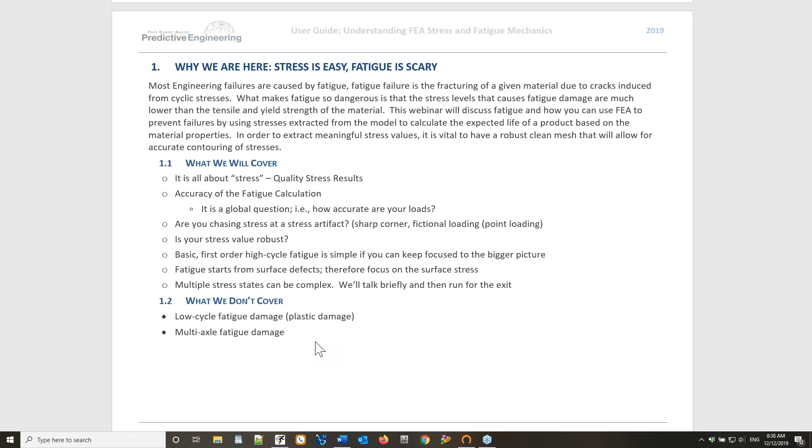And it's actually a legal term. If you're a professional engineer, you're required to work within your specialty, in the sense that you're competent. If you stamp a document, put your seal on it, it means you're working within your competency. So I think this little fatigue discussion today will allow you to say, okay, this is within my competency, or go find an expert to figure it out for that other 20%.

What do we know? Why are we here? Why is this not just rambling? We've done lots of stuff on fatigue, lots and lots of stuff. It's been tested, it's been in the field, it's been running for years and years.

And that's where I call the difference on a simulation engineer - it takes longer for you to get qualified because your mistakes have to catch up to you. Many people can bang out a model, done, look at that, fantastic. They can build it, they might pass initial prototyping, and then it goes into the field, but won't survive in the field. And that takes a few years to come back.

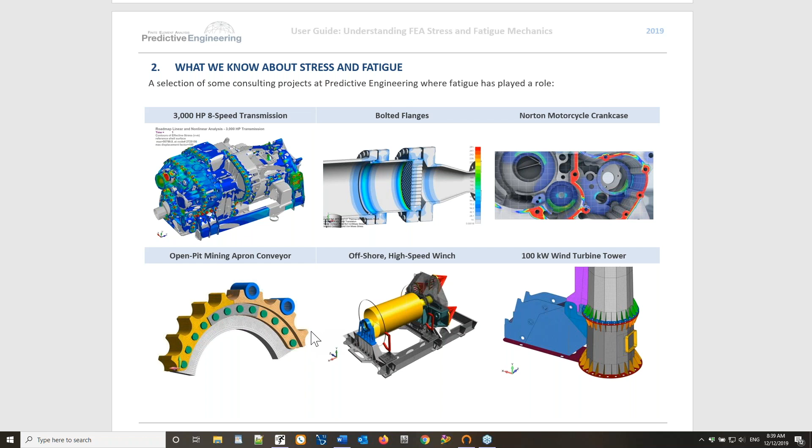So all these things - we've been at Predictive Engineering now going on 25 years, so we haven't had anything yet come back that we know of. So transmissions, pressure vessels, crankcases for motorcycles, gears, open pit mining - all these things involve doing fatigue analysis.

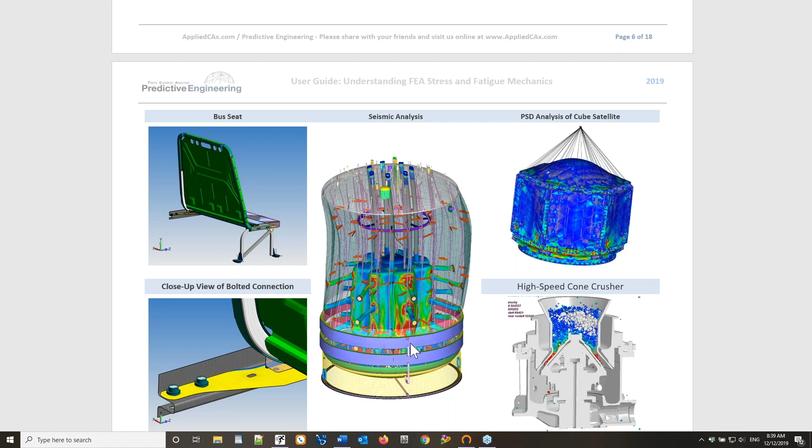A lot of this stuff is as simple as looking at the stress and saying, it's low enough, it's not going to fatigue - done, checkbox. Some of these are not so simple. This one, in the seismic analysis, was spreadsheets and spreadsheets and spreadsheets of summing load cases and directions and adding vectors. Hey, but it worked.

Mining equipment, composites - composites are another story of fatigue, another topic, I don't want to get into it. We could definitely spend time in the weeds on that. Okay, that's sort of our background, why we're here.

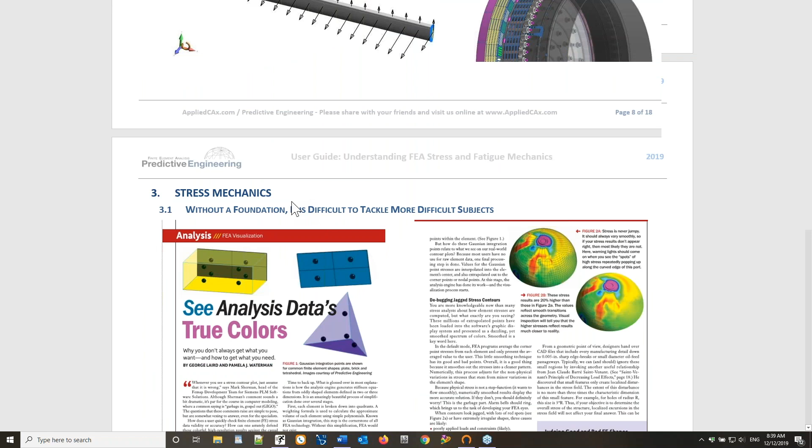Stress mechanics. When people get into it, we're using isoparametric elements to fill up shapes - random geometry, random surfaces, shell elements, isoparametric, solid elements, isoparametric. They're all using approximations to capture the deformation gradient through the structure.

Finite approximations. So isoparametric means it's using the same shape function to map the displacement at the corner nodes to the interior of the element. Then it can calculate strain inside the element, and from that strain, you get stress via Hooke's law. So it's a two-step thing.

Since you're using these approximations on an isoparametric element, it maps everything to a unity space, -1 to +1 in the dimensions. So whatever shape your element starts out with, it always ends up being numerically mapped to unity, -1, +1. The more uniform your element, the easier the mapping, which is called the Jacobian. The easier the mapping, the more accurate the element is in capturing the area for a shell or the volume for a solid, which translates to more accurate stiffness values, more accurate displacements, and more accurate strains and stresses.

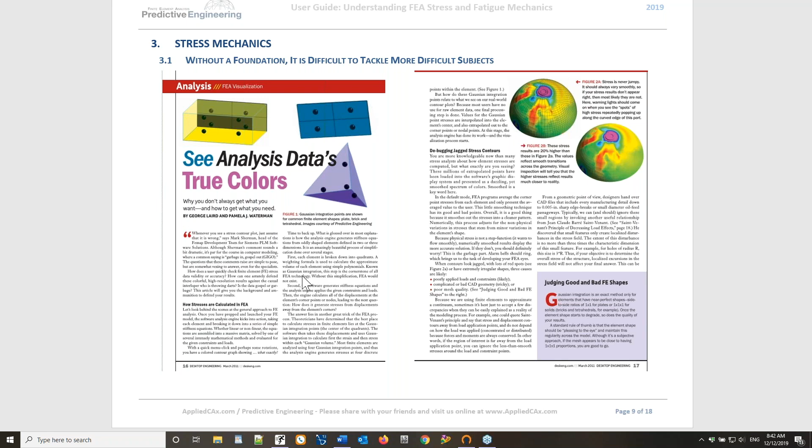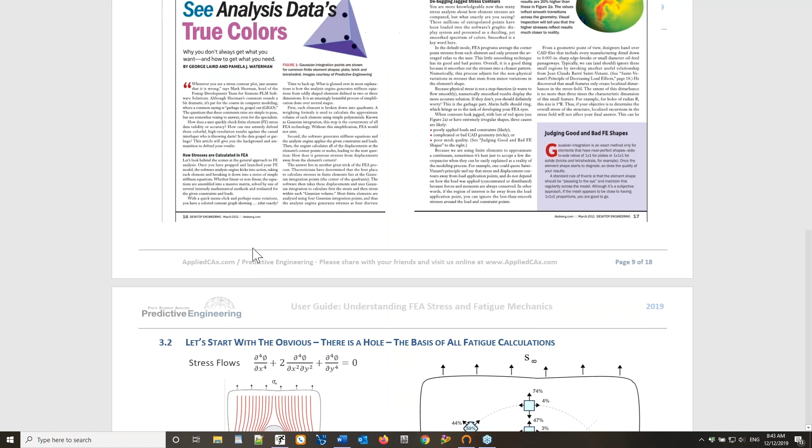Yay, I know, if you guys in the audience can't tell, this really is one of my favorite topics. I love all the mechanics stuff on it, and it's not a bunch of math. It's just unfortunate that most of the FEA textbooks out there are developed by mathematicians that masquerade as engineers, and they just love equations, and you go, wait, I know this has some real use.

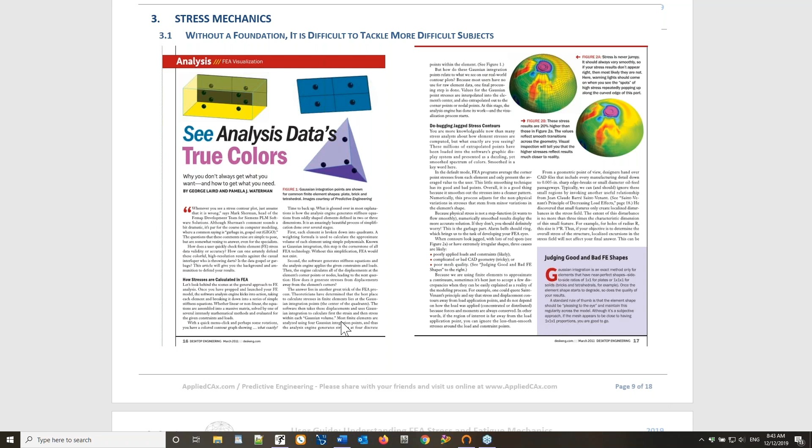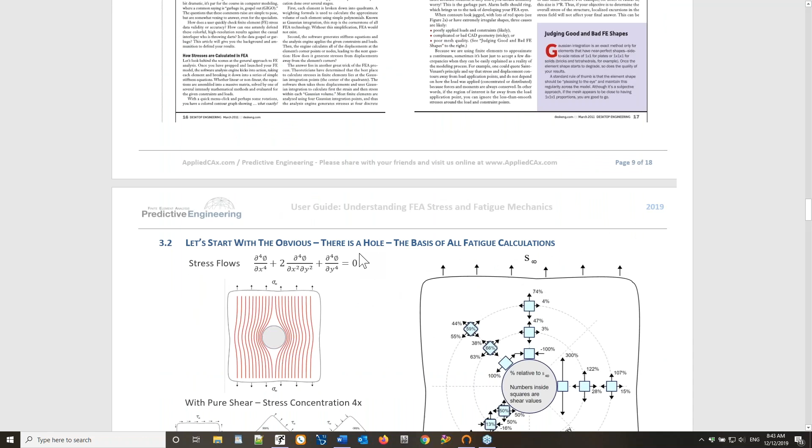So anyway, this article here will be part of the deliverable that will go on the web, so it's out there too. Okay, now that we've talked a little stress, I am going to show a model. I'm just not going to talk the whole time. Don't worry, I am going to show a new FEA map, but I've got to set some expectations.

All materials have holes. All materials, steels, whatever, they all have defects. We all know that. We always start out with using a plate to show stress concentration, because a plate with a hole is all around. I always really like this graph with the lines, and of course I got this from the website fracturemechanics.org, but they're all over the place, these little drawings.

It's under uniform tension, and you get the stress lines like that. One of the things, when you look at your stress, it should flow, because it's biharmonic. That's another way you judge the quality of your stress results - does it flow? Can you turn off the mesh and it looks smooth and groovy? That's the way stress is, because it flows. It's biharmonic, a partial differential equation.

So on the right, we talk about what happens on the stresses around a hole. You can see on the right-hand side, under tension, you get a 300% magnifier, and at the very top, under compression, you get a compression of 1. What they're saying is 1 to 300%, but it's a uniform tensile field in an infinite plate, so it's a 3 to 1, 3 to -1.

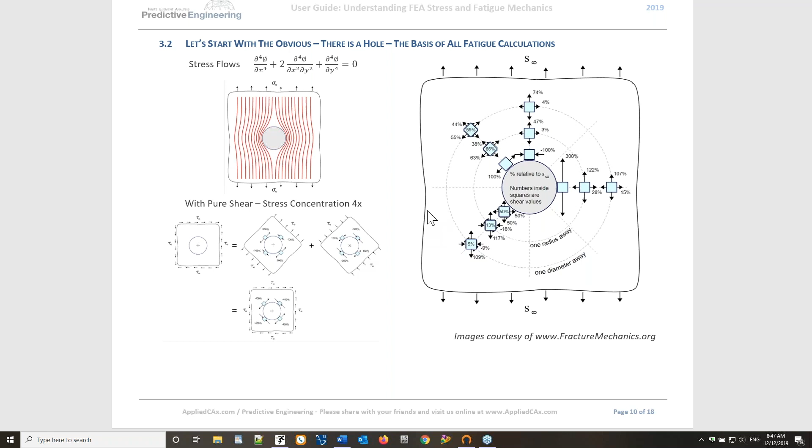And it's cute too, when you work in composites, a standard swag is, we always knock down the properties by 3 and use that as our design limit, whatever the properties are, knock it by 3 and just use that. Well, of course, every composite structure I've seen has holes in it. But it's nice to see how all these engineering rules are developed, they're just based on mechanics, obvious mechanics.

So, okay, let's play around a little bit. Let's do a little bit of stress modeling with FEMAP.

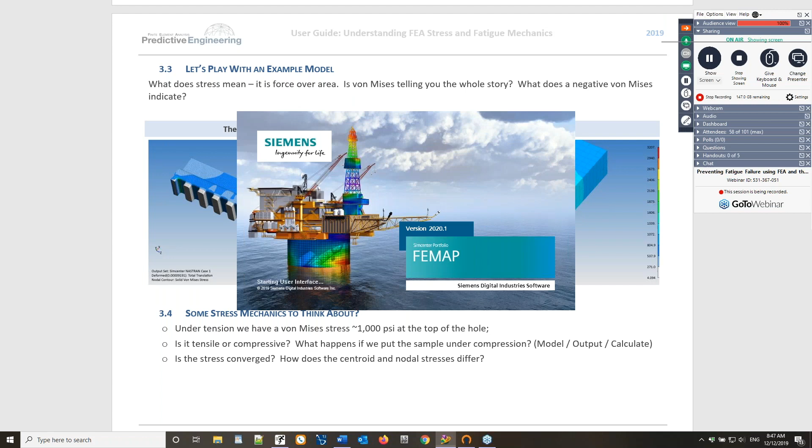So this is version 2020.1, they got the new logo. And I know, show tips—even though I turn them on, I like to check and see what they're saying. So whenever I have a new version, I always keep this on for a while before I give up and turn it off. They can turn it off too if they want.

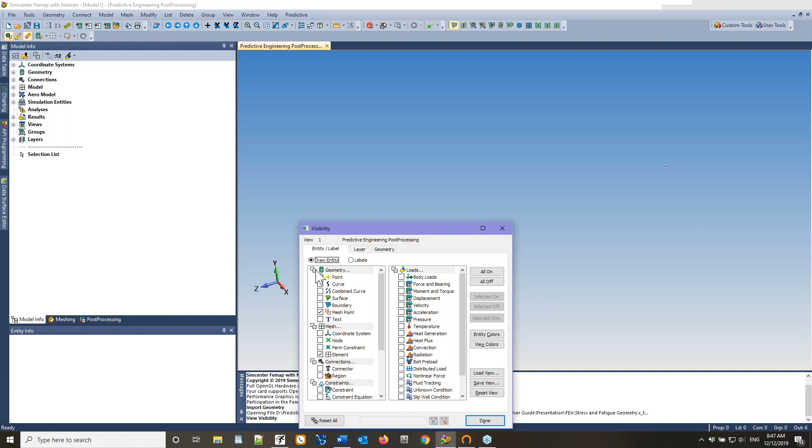Okay, this is our little play-around geometry. Control Q, because by default I turn off geometry, I don't want to use it, I don't need it.

So we have a hole in a plate, and this is going to be our symmetry plane here. With this structure, since I'm going to give a uniform load across the top, I have another plane of symmetry I can get rid of.

So I'm going to go ahead and slice it down. I've got to pick all like that. And okay, this is one of those things where you can just pick on the curve, it's got that intelligent pick on it. No, I've got to undo, sorry about that.

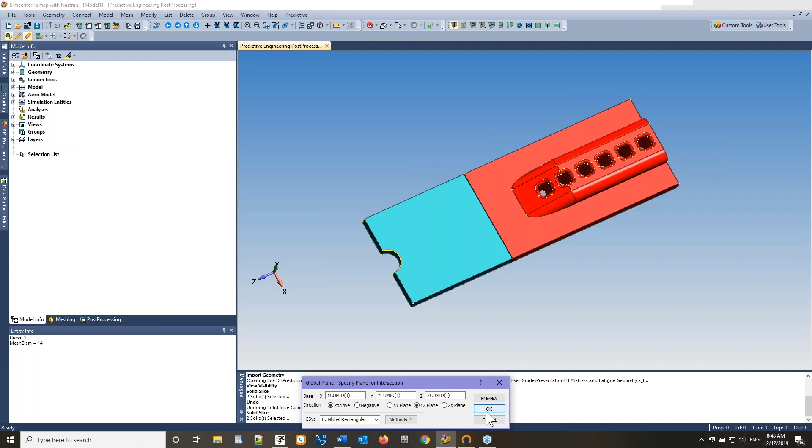I want to say, don't be surprised if I'm not perfect on all these picks and you're going, why did that guy do that? Well, I don't practice these very much. I just ran through it very little because I don't like over-practicing, I like doing it a little bit raw.

And oh yeah, one of those things, preferences—that smart pick that I pick up, view, graphics, user interface. That's right there, smart, number 4 in your preferences.

Oh, while we're here, I can't help but jump into views a little bit. Did you guys know that on the copy icon you can scale your copy by different factors? I set it to 2, so when you copy things to the engineering report, it's twice the resolution on the screen. It makes things a little sharper on your graphics.

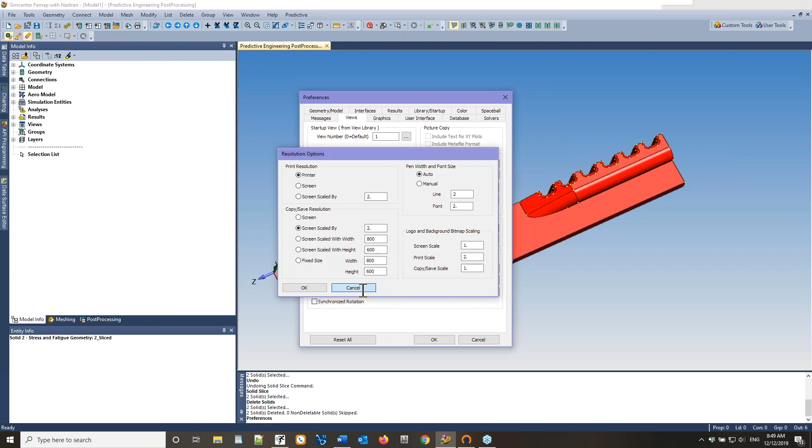Okay, so I slice it down through this. And now here's the question: given the loading of pure uniform, given the geometry, is there another plane of symmetry in this model? Well, that's a real simple question, I'm not going to answer it—it's one of those fundamental things.

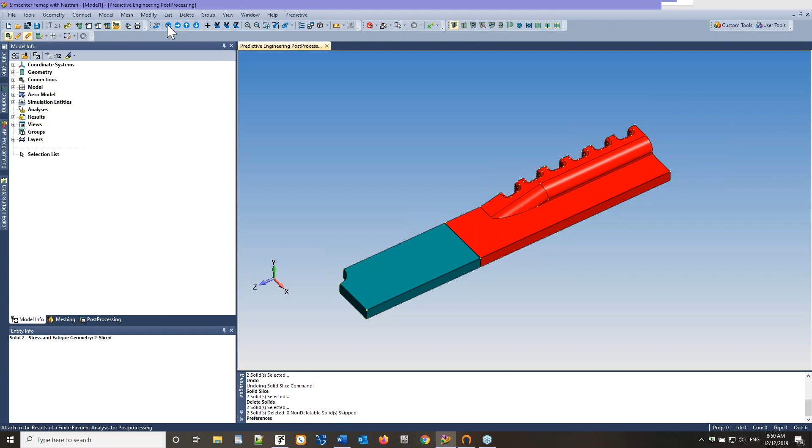So let's mesh it, what do I got here? I brought it in as new, so I've got to go in first and set the mesh sizing. I'm going to show you how to use the new pyramid setup, the little pyramid transition between hex and the other thing. I'll set it and turn on the mesh sizing like that. Okay, then I'll go into mesh geometry—I'm going to hex mesh this part first.

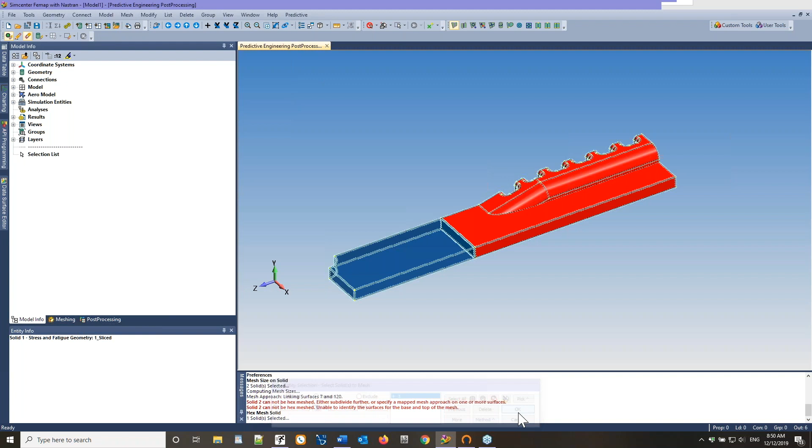And I don't care, I'm just going to give it some steel like that. So there's our hex mesh. And for this part, I want it to transition. I want it to be 10 node tets up here, and I'm going to let it transition over. Check this out, I've been playing around with this. I could use a glued connection too, but it's like, meh.

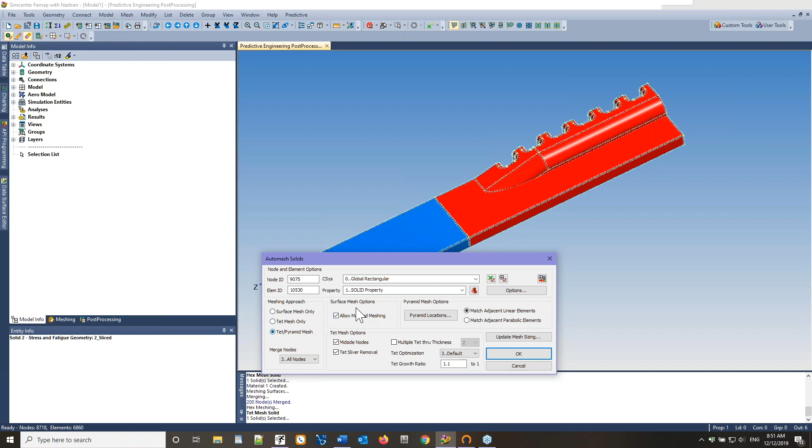So this is new. This is set up. It will use a pyramid mesh. They'll transition between the hex into the tet. And I told it to go ahead and merge the nodes so I don't have to deal with it. The logic behind it is that when I set up the meshing on this together as two parts, it set up a master-slave relationship between the two surfaces. So this solid here knows that there's a hex mesh on this side, so it knows how to do the transition like that.

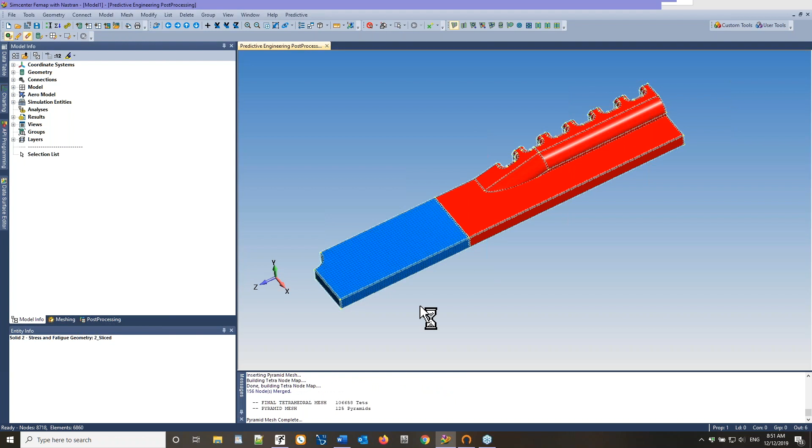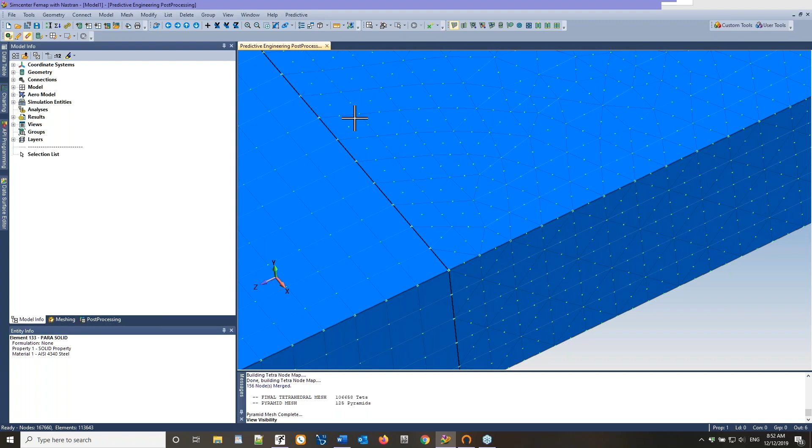So it'll even tell you it's inserting pyramid mesh, and then it'll say merge, and I'll go ahead and turn on the nodes here, and you can see how that transition worked. In here we have our 10 node tet, and I'll go up to the selector and turn on element, and you can see the pyramid mesh right there, like that. So it's buried inside, there is a pyramid in there, I can't quite see it. So I'm gonna turn all off and turn on geometry, and I think you guys know what I mean, there's showing the translucency between the two, shows that connection between the two geometries.

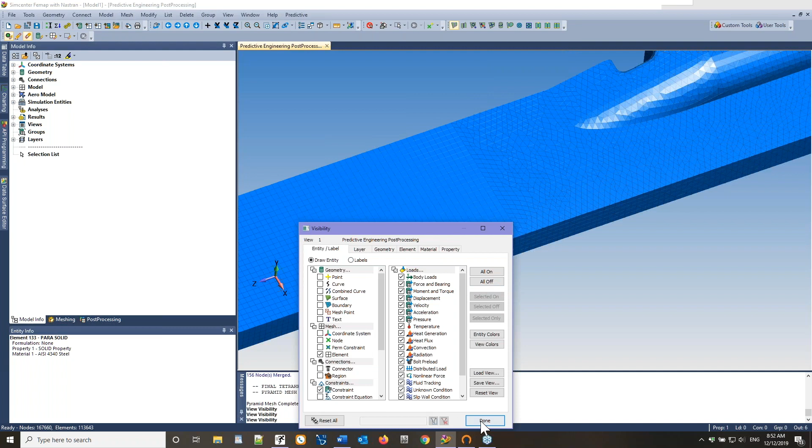Okay, so I'm gonna turn on element loads, and I'm gonna turn on constraint like that. So that was a nice setup.

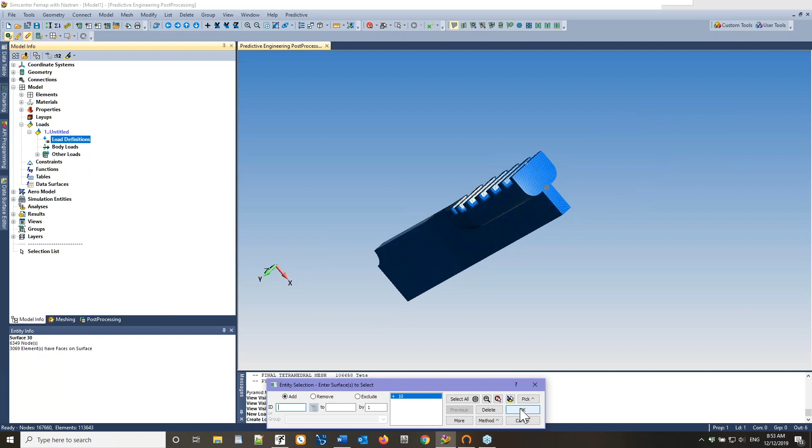So on this model here, I'm going to put a uniform load onto it, and I need to run it. So I'm going to do the load first. I'm not going to give it a name. I'm going to put it on a surface, and I want it to be the equivalent of 1,000 psi down on this section. I know the cross-sectional area down here is 0.05, and I want to put it under tension, so I've got to go the opposite direction on that, like that.

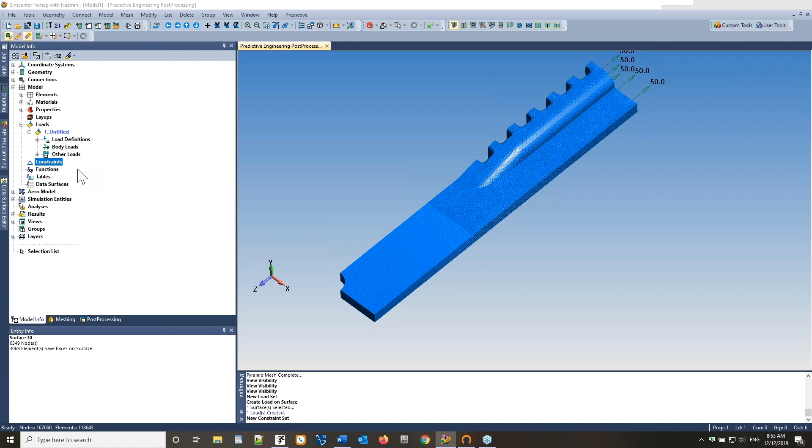And then on constraints, this is one of the tricks I've been doing. I'm going to do nodal, but I'm going to pick based on coordinate. It's that X direction right there that I want at location. Gives you a little pick right there. I'll pick that, say okay, that looks good, hit the little view. Yep, there's my plane of symmetry that I want.

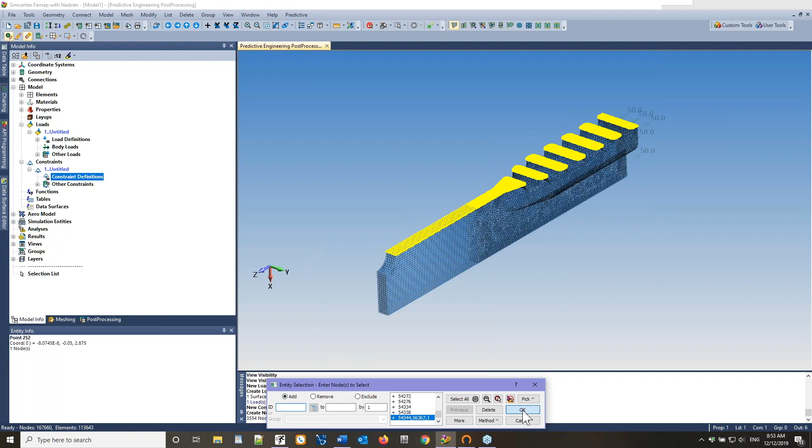Fix it in the direction normal, and I have my own little symbols I like to use and the colors. I'll right click, previous command, and I want to pick just on this surface here, right there, and that's going to be in the Z direction. So now I've defined the two planes of symmetry, I've tied it down in the X direction, I tied it down in the Z direction, and I have the 3 degrees of rotation constraint between the two surfaces.

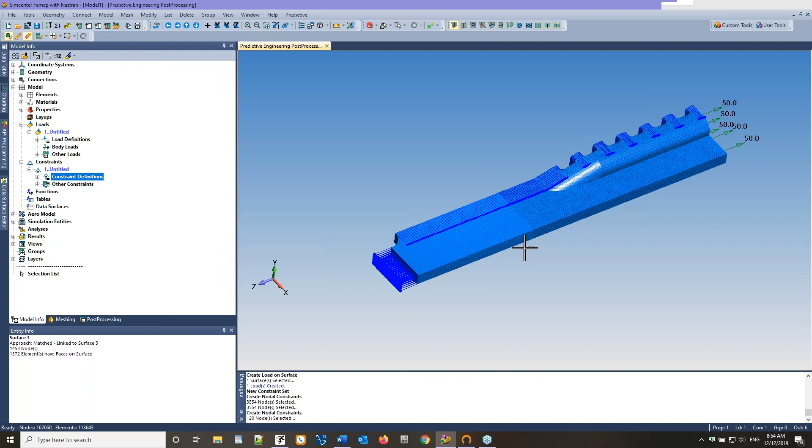All I need now is one more node. I don't want it to fly off into space in the Y direction, it can't move in the Y like that, so I'll constrain that. So I have the 3 translation and I have the 3 rotation defined.

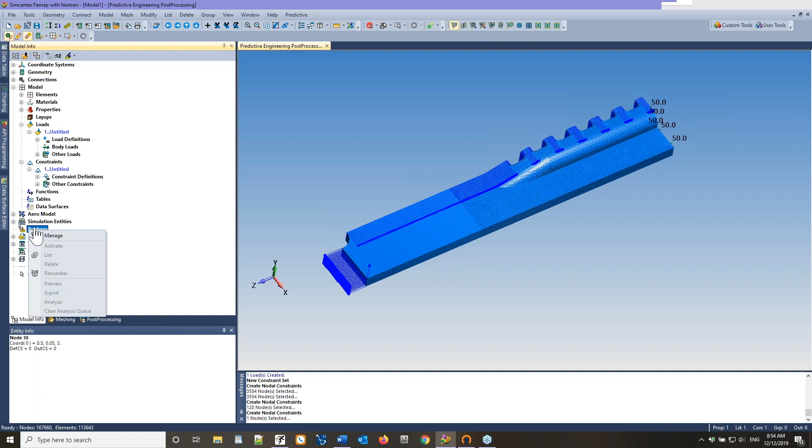Okay, so now let's run this thing. Because I've defined a material, defined the elements, defined a load, defined a constraint, I'm done. I'll go to new. And I don't know if many people use this, but...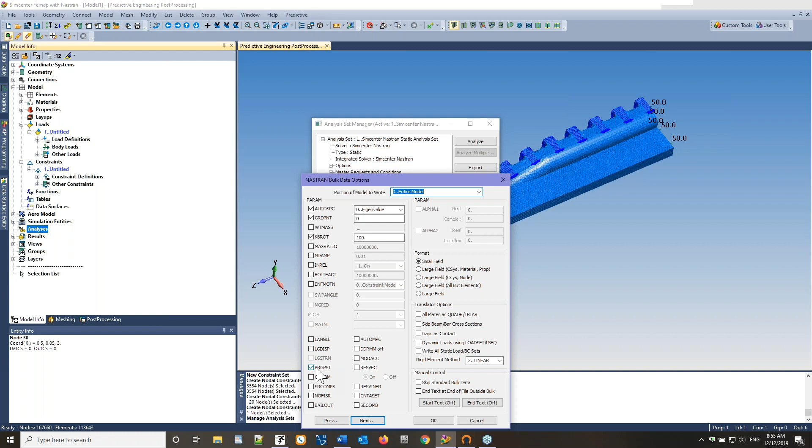If you're dealing with a mesh that's dominantly 10 node tets, meaning it's very sparse, the element iterative solver is quite fast. And if you're dealing with solid elements, Nastran likes to print out these messages about tied down rotational degrees, grid point messages. Well, print grid point message, I'm going to turn that off, I don't care about that. And everything else is linear. So let's see if it's going to work, because I haven't practiced this far.

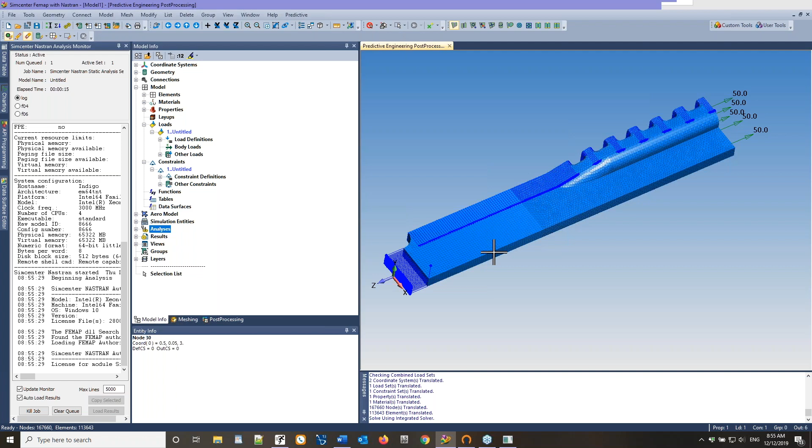I want to say this is my workflow. This is not something I'm doing for a demo. Yes, I could make it more simple for a demo, less clicks, but I don't like doing that.

So here's the solver. Let's go look at the F06 file. It ran, damn it, too fast. There we go, August 9, 2019, SimCenter Nastran 2019.

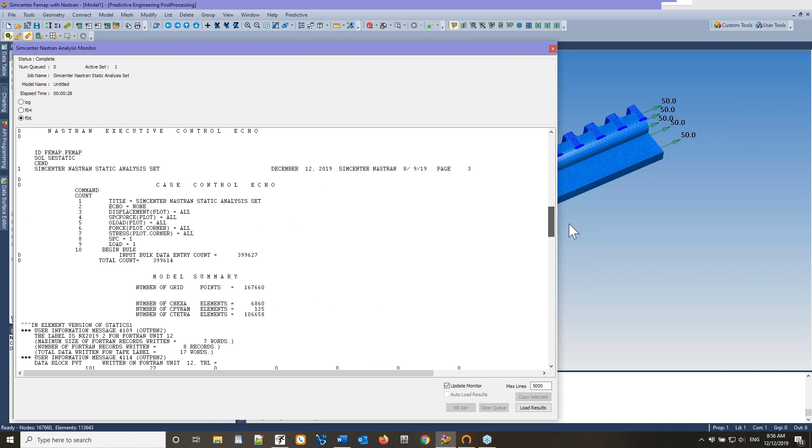You guys know the load is going in, and it shows that we put in 50 pounds, a little round off error there. Then we have our SPC force result. Hey, that's what was calculated by the solver. That lines up. Everything looks pretty good. Did I get that? There's my result set, so I can close that out.

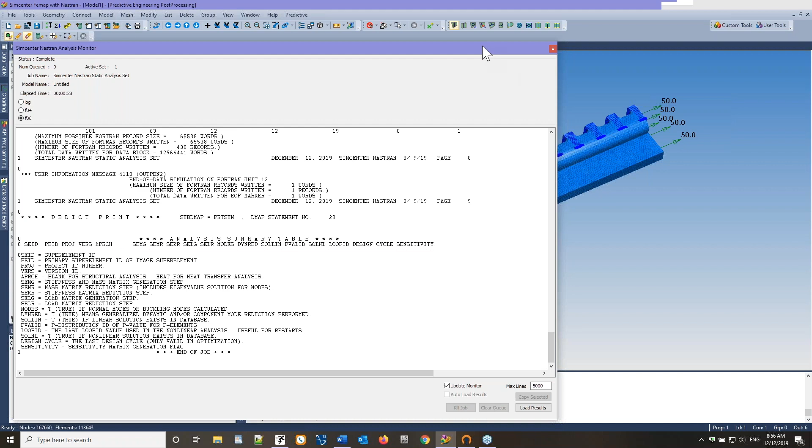So go into post-processing, go to contour, Nastran, solid. And now I want to turn off everything I don't need. All off, turn on element.

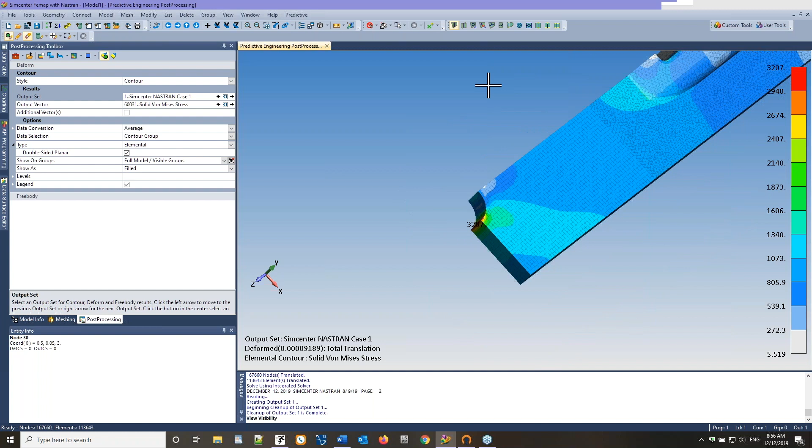It's higher than 3 because we don't have an infinite plate. And so even though it's 1,000 uniform through here, we don't have an infinite plate, so it's going to be a little higher, but got 3,200 there. And we know that, and it makes sense, but this is another thing.

It's up here for the von Mises. You don't get a good idea because it just shows the other color. And I used to do this more often. I'll put this to node, and I'll put this to show tooltip.

What I want to do is go into the results, contour options, and set it to nodal, because I'm picking on a node, and so when it contours, it needs to think about the results being at the node. So when you do that, you get this little thing.

I used to do this more often, that it comes up, and then you can right click and convert to text. And it says 1,000. And then it goes off, and you go, what? What? You got to turn it back on. We'll turn it back on like that. 1,000 at the thing. But it's just von Mises, and we don't know whether it's positive or negative.

This is one of my engineering quiz questions: what does it mean when your von Mises stress indicates negative? Well, if you know how von Mises is calculated, you'd be a little worried if you saw a negative von Mises. So now this is under tension. So what would be the stress at this point if the load was reversed?

There's going to be a point to this. This is going to tie back into fatigue in a second. We're always thinking of cracks and tensile stress. And if you work in stress mechanics, your first pass is von Mises, and then you contour the maximal principal stress, because things fail in tension dominantly.

That's a big thing. So you look at the maximum principal stress and say, okay, what's the maximum tensile stress, and is that going to tear my structure apart? We don't often think about compressive loads that much, because we say it's in compression, nothing fails under compression, right? There is no tensile stresses.

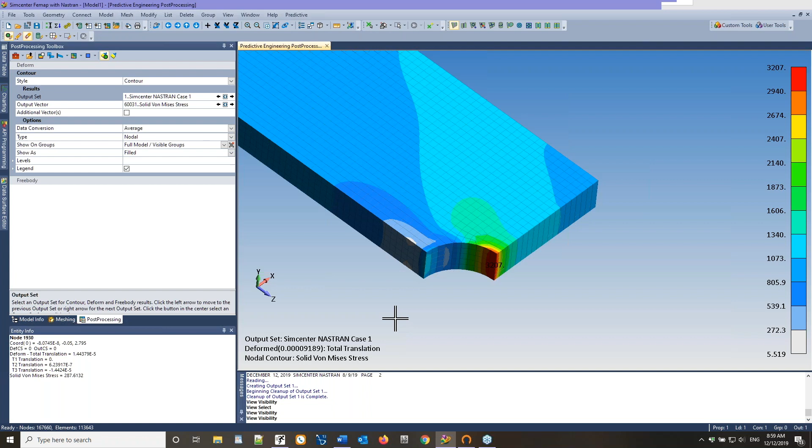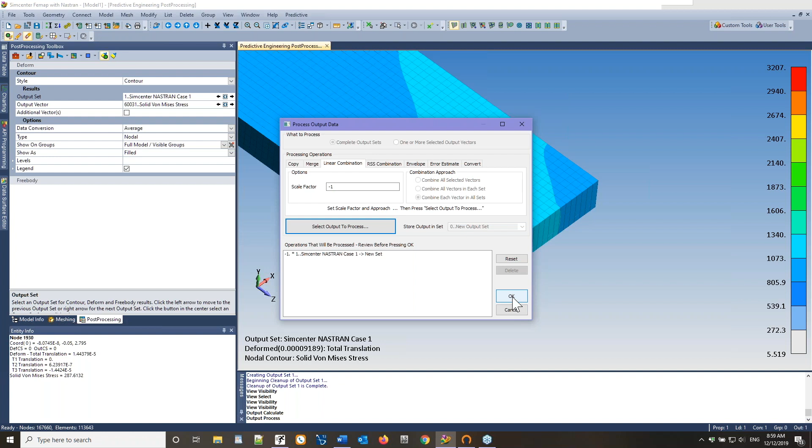I put calculate. So I'm going to do a linear combination, and scale it by -1, like there, and I'm going to select my output, like that, there. I'm just going to generate a new output set instead of rerunning. And then I'll go back into here, and there.

I'll come up with a linear combination. And the von Mises stress, you see, it didn't change. Well, it can't. Von Mises doesn't know the difference between compressive or tensile. It just indicates the presence of stress.

Oh, I hit F5. Yeah, I'm so comfortable going here. Let me change the thing down here. And so it's like, oh, habits are hard to break. So it's like, no, I could use this fancy dancy thing right there. I'm going to look at the solid max. And this is what I like to show.

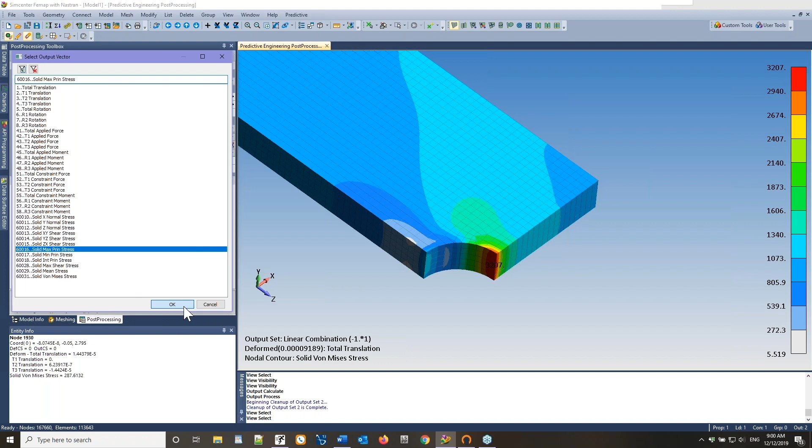Under compression, remember I'm contouring the maximum principal stress. That's tensile. We know that because when I was talking about the hole in the plate, most everyone was nodding their heads, yeah, 3 to -1, but not really quite getting the point of what's going on at the top of the hole.

Well, under compression, if you have a pressure of a stress of 1,000 in compression, you're going to generate a tensile stress of 1,000 at the top of a hole. And whether it's a hole or a sphere inclusion or defect in a solid, it's going to be the same. You're going to generate this tensile stress at the top.

Now, before I leave this, I want to talk a little on stress averaging, because this comes up. This still has utility. Dynamic max min, so I can look at the stresses real quick, contour options. So I have it set to nodal. I'm going to turn it back to elemental, like that.

On data conversion, it's averaging at the nodes. Each element is an island. Stresses are calculated at the Gaussian integration points, which means, let's keep it simple, like a shell or a brick, that if we're dealing with a shell, we have 4 integration points: Nastran, ANSYS, Abaqus, LS-Dyna. 4 integration points, 4 stresses are calculated there. And then they're extrapolated to the nodal points using the shape function of the element, or they're interpolated to the center of the element at the centroid.

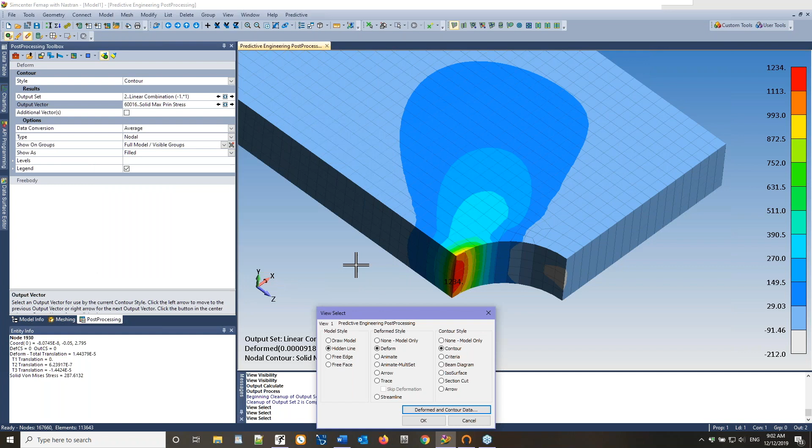So for Nastran, each element outputs a centroid stress and 4 nodal stresses for all the components, and then they're averaged. Now, if we say don't use corner data, it's going to change, because you see how it dropped down? Because it's not extrapolating out to the edge, it's using data at the centroid. One of the things I like to do, if I'm really wondering about the quality of the stress, is look at what's happening at the centroid as compared to the nodal points. And these are average nodal stresses.

And the element I picked, I hope the resolution works for you guys, but you have the centroid stress at the top, which says 800. And then you see the variation at the nodal points down below. I think of that as the work that isoparametric element has to do from the centroid out to the edges. The most accurate stress that you have for an element is at its centroid, because it's interpolating from the integration points. So this is one of my judges that I use for the quality of the stress results, is how much work is being done between the centroid and the nodes.

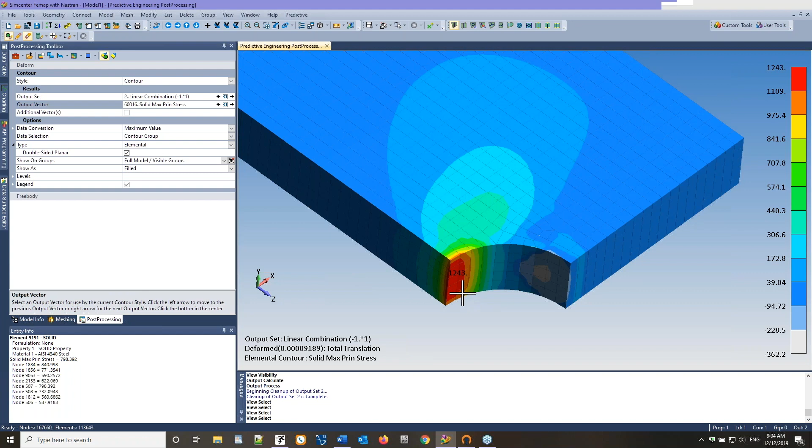And people will also say, well, some people say, no, I'm going to turn this back on, I want to use the max value. Well, all it does is look at all the adjacent elements and say, what's the max value? See a little shift, because now it's pulling the max value. I don't subscribe to that theory of it being more conservative, because knowing how elements are calculated and the numerical formulation is, the max value could be a little tweak, a little badly formed element, usually not a quality value. And when you average, you're pulling in the best, you're averaging to a better mean value.

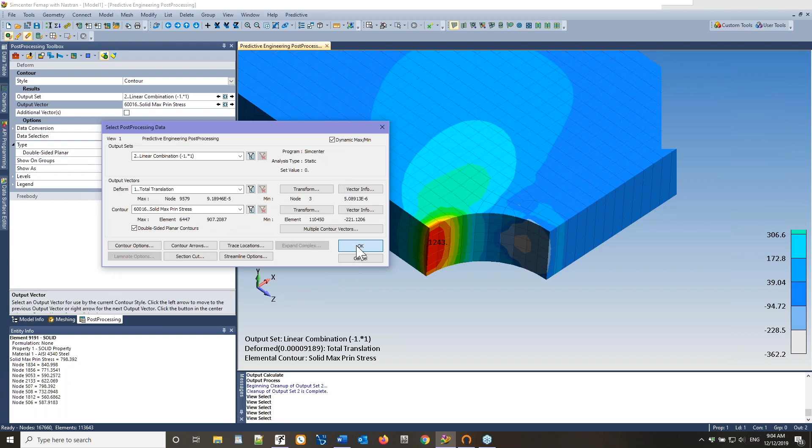So really, FEMAP is geared up on the default to be the best approach, as far as I can figure — you would never want to change it. But people do. Some say, no, I want to use the max, and they make these long discussions. Fine, keep it, enjoy your party.

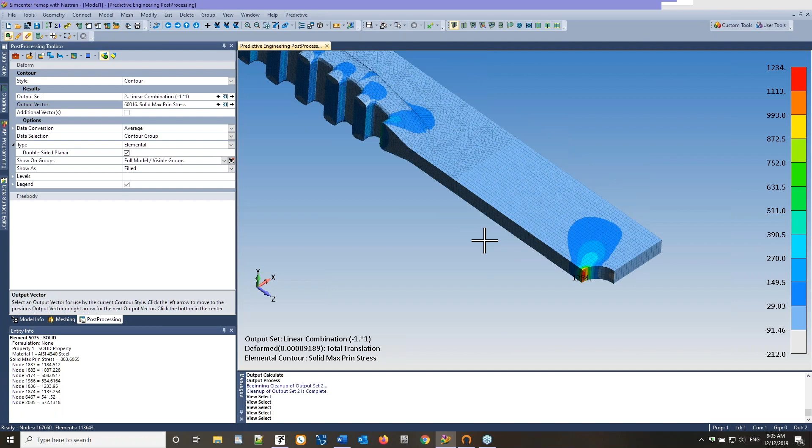Okay, this is what I wanted to use this model for. I wanted to talk about stresses around the hole and emphasize how it changes at the top. I wanted to introduce the transition meshing, at least show the 2020.

George, sorry to interrupt, we had a quick question. I'm pretty sure it does, but do the pyramids work for both mid-side TET meshes or without the mid-side node as well? I didn't play around with that yet. I didn't quite catch that, I heard somebody banging on the table and something else. Sorry, I was asking if the pyramid meshes work for mid-side TET meshes, or can you use it without the mid-side nodes as well?

Yeah, on the pyramid mesh, what they're doing is just a blend at the interface. So it works for both. And they suck — I mean, anytime you have a change in element formulation, you're talking about a change in the shape function of the element. And would I ever put a pyramid in a high stress region of interest? No.

Would I even do a hex to a TET or a glue transition in a region of high interest? No. But the question was, does it work with mid-side TET meshes? What it does in the back is rip off nodes and maintains continuity along the merged edges. So on a 10 node TET, it'll remove a mid-side node to maintain continuity with the pyramid. If the pyramid doesn't have a mid-side, if it has a mid-side, it'll blend it in. I'm pretty sure, 80% confident on that one.

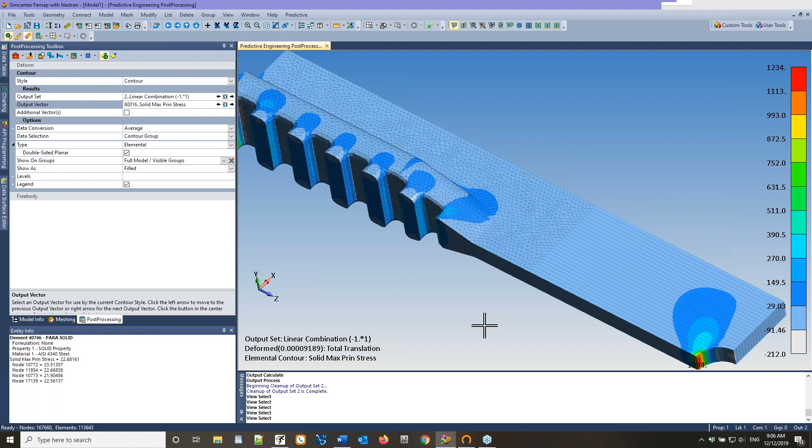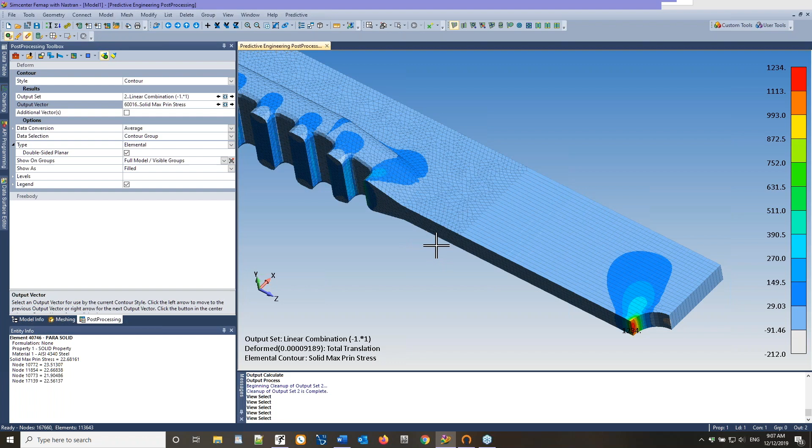Like a lot of things people ask, how do you get more confident? If you've worked with me, you know my answer: I build a small test model and I look at it. How close to a region is important, and how does the transition work? I build a small model and look at it. Because it's mechanics, there's no one right answer exactly.

Okay, I've had my fun with this. So these are some stress mechanics to think about. Under tension, talked about that. Tensile compressive stress convergence, I talked about nodal, centroid nodal. This is really, you can tell, notes to myself.

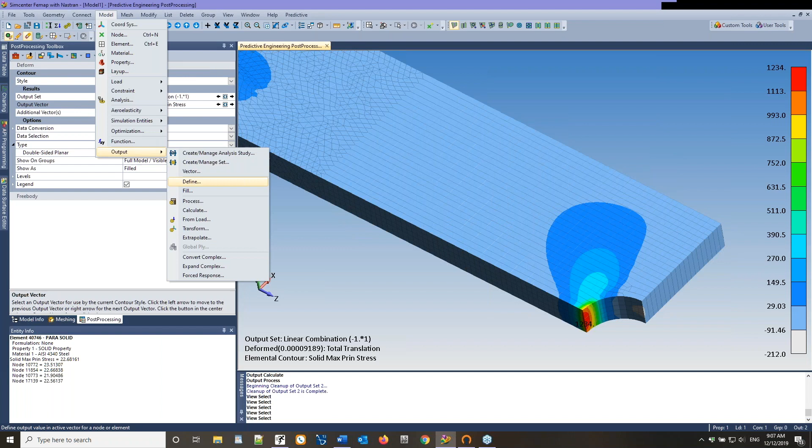Good, I caught that. Oh, it turned on my email process. I thought I was so clever. Okay, yeah, I got to turn off my email.

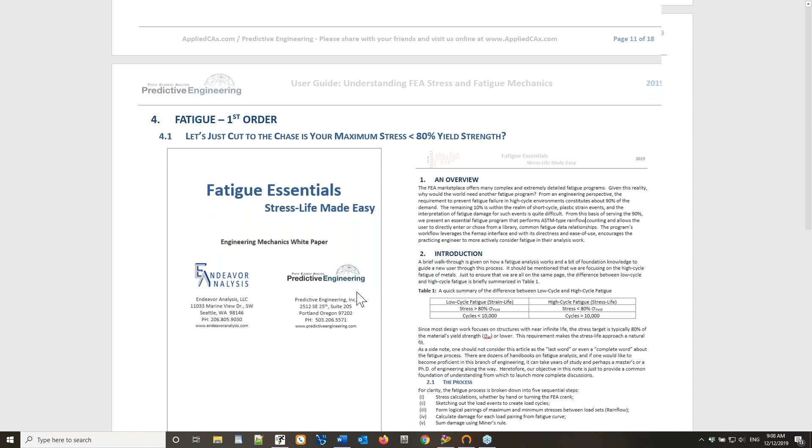Okay, now we're ready to talk about fatigue. This little white paper is part of the deliverable, it'll be there if you want to pick it up, and I cut out the pages of interest. We're going to talk about high cycle fatigue. I'm not going to mess around with anything in low cycle, stress over 80% of yield.

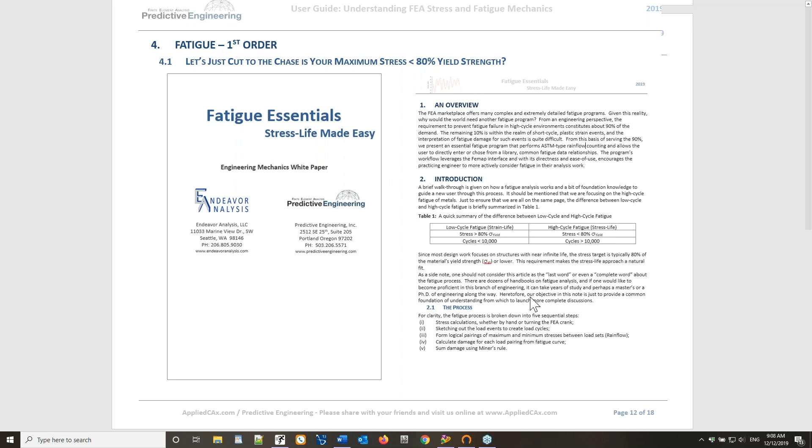High cycle is clean, there's no plasticity to worry about below 80% of yield. High cycle, because low cycle, anything under 10,000 cycles, you're not going to have any damage, it's all good to go. This is part of the thing, knowing your cycles. This is my quick and easy overview because we only have another 22 minutes, so I can't get too deep into things.

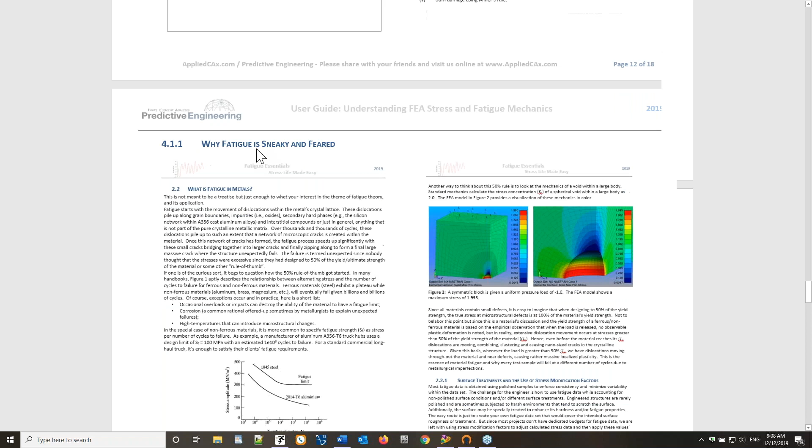Why is fatigue sneaky and feared? Because it's the stress concentrations, the holes in your material. People go, wait, I built this beautiful model and the stresses are 80, 60% of yield, I don't have to worry about fatigue. Well, as you know from the prior mechanics, anywhere you have a tensile field, if you've got a solid material, just double your stress. Just double it, you just know somewhere there's a void and it's going to be double.

Then people say, well, the load's mostly compressive, I don't have to worry about that. Well, you now know under compression, if you have a defect, a void, an inclusion, you're going to have a tensile stress equal to the magnitude of the loading. Being a material scientist for many years, running tests, you could take a material like stainless steel, it's like butter, squeeze it down to foil and it wouldn't break. But it all depends on the purity of your material.

But for materials that have any sort of voids, when you start to squeeze them down, you get this shearing, this boom effect where they shear through. Under fracture mechanics, nothing should ever fail under compression. But if you know about defects and stress concentrations, at the top of any defect you're going to get a tensile stress normal to the loading, or perpendicular to the loading. So you push down any defect, you're going to get a tensile stress perpendicular to that load field.

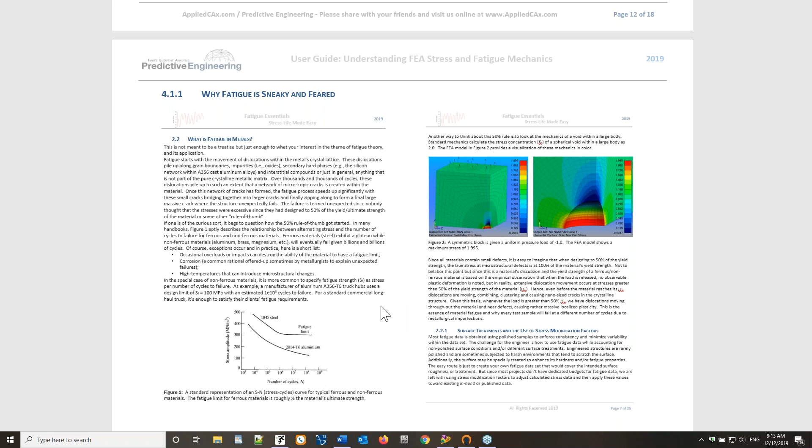What else should I cover? I know about defects, I understand that, I understand where I got to go. Surface. Well, surface has defects, stress concentration, surface roughness, and there's been lots of really nice work done on the effects of surface. And I like this one brutally simple figure on the left.

This is out of Julie Bannantine, my favorite fatigue book. At the end I'll show you the reference for that, and I'm sure she got it from somewhere else - it's a reference in her book - but it shows where the strength of your materials for steels and the surface roughness relate, and the thing on the side, the surface factor, is your stress - you take your stress and divide it by that number.

So let's say you see a stress in your model, and it's 100,000, and your yield strength is 200,000 - I'm keeping it simple, 200. You got 100. So let's say you had a surface roughness somewhere where the surface factor was 0.7. Then you would take your 100,000, divide that by 0.7, and your surface stress for fatigue would be roughly 140,000. Hey Brian, did I get that right? 100 divided by 0.7? I think so, yeah. I think so, 140.

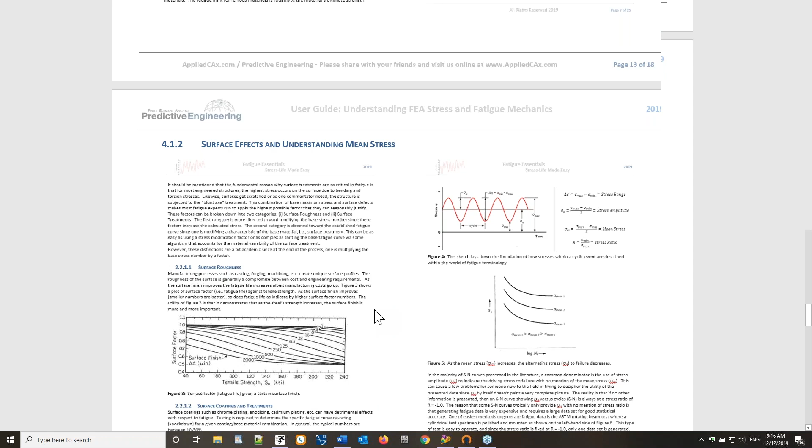So we also have to deal with mean stress. It's alternating. So I want to pause right there. Okay, so this is going to be the cyclic.

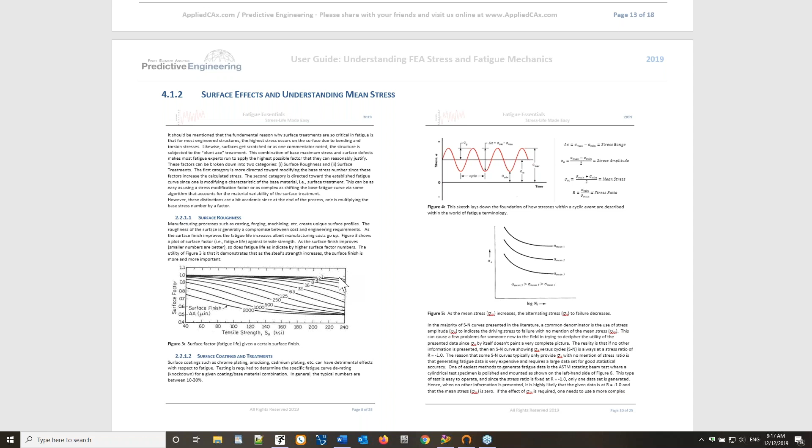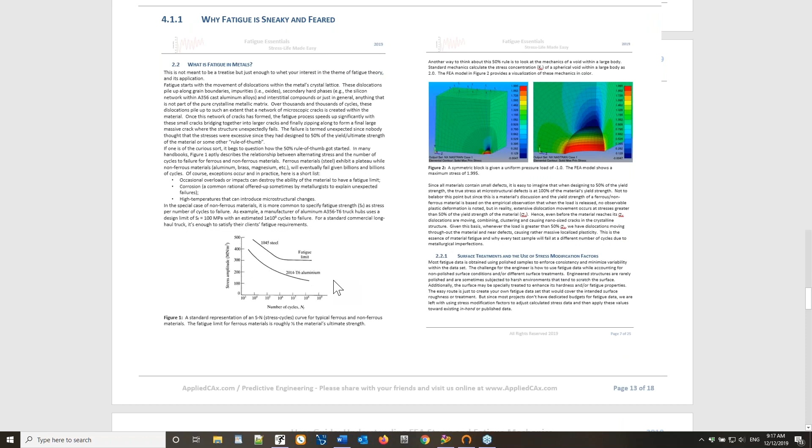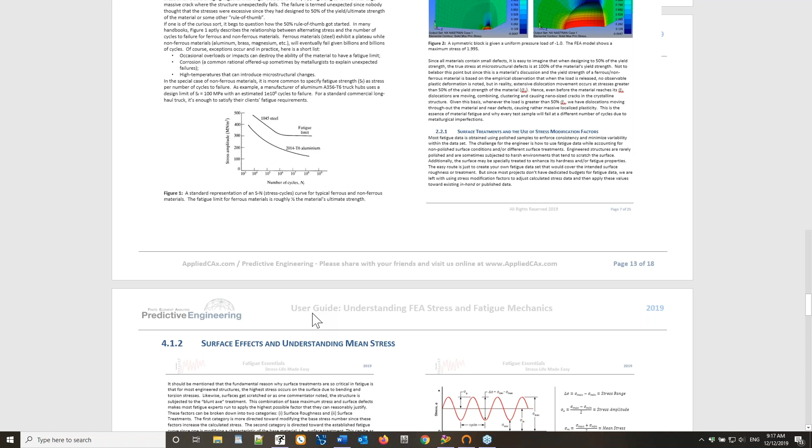A lot of times people say this is one load case, and we know we're going to have 100,000 or 200,000 cycles. For the surface roughness, I'll just take the stress state, multiply it by 1.4, cross my fingers and hope it's at 50% of yield of the material. And if it is, just stamp it. Done. Infinite life. Go home. One load case: look at the stress, look at the surface finish, multiply by 1.4, check it's under 50% yield, stamp it, go home.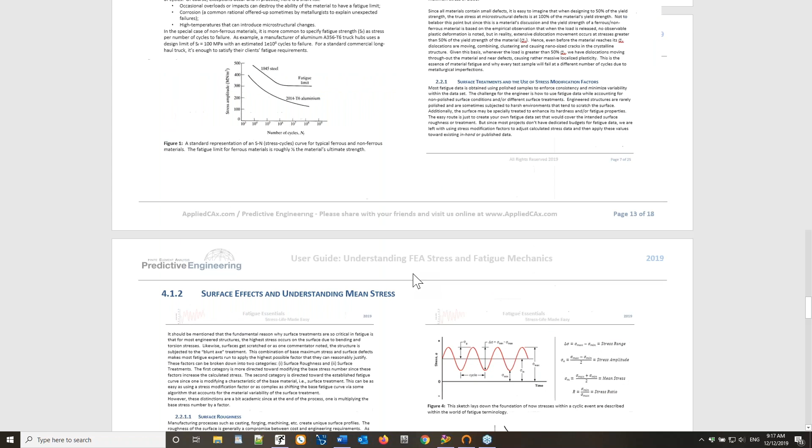I wish everything was that simple, but it's not. So then you have these cases where you have alternating stress, the classic case, but with a mean stress in it. So it's elevated, and that can't be good, but it's not the end of the world. It's just not as good.

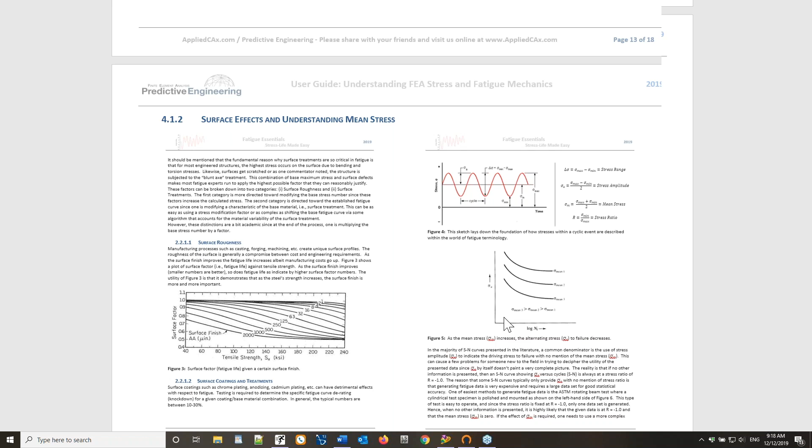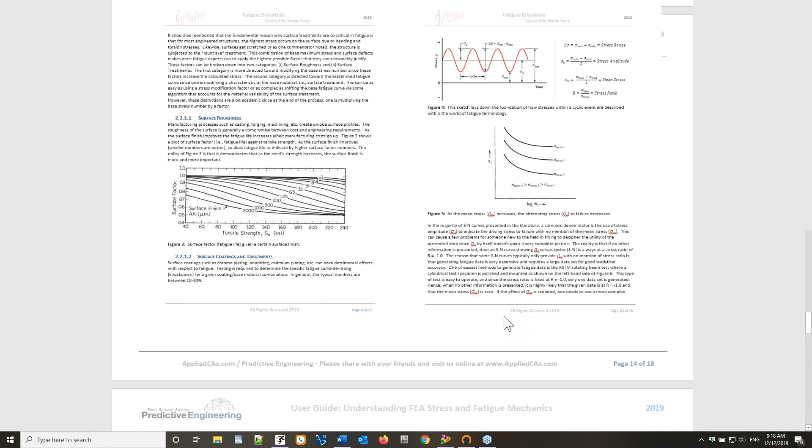This is where I get more into the paper, and I don't want to get too deep into mean stress effects, because you need to work it out with a piece of paper and a pencil in your own quiet space and figure it out. Trying to gloss over it in 12 minutes is a little bit brutal, but let me do a really high level discussion on it.

Fatigue data comes from multiple specimens that are nicely polished and fully reversed, up down up down. They call that R-1, fully reversed. You get these graphs on top, but when you add mean stress to it, the curve shifts downward, meaning your fatigue life is less. That should make obvious sense, right? The effects of positive mean stress is going to shorten up your fatigue life. I call that the feel-good engineering - yep, that makes sense.

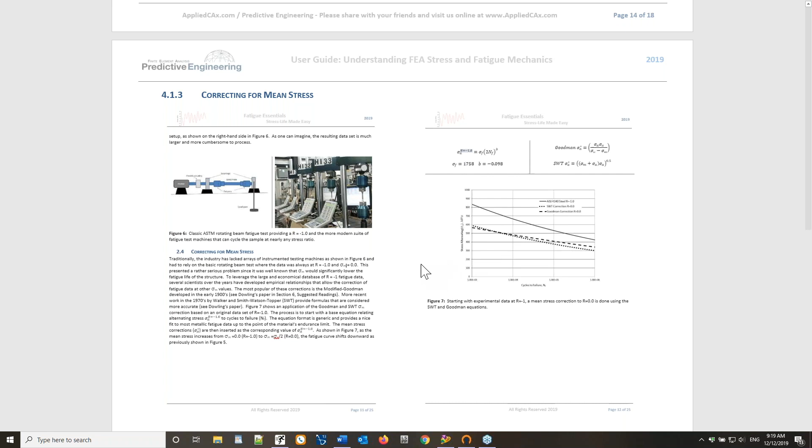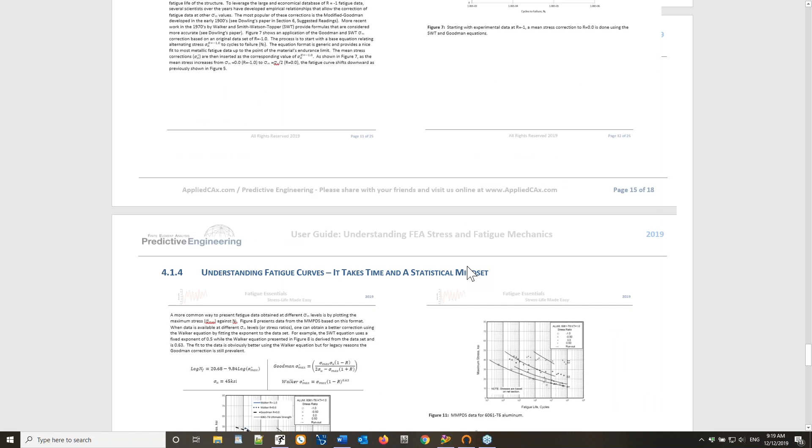The math is just algebra, it's pretty simple - Smith, Watson, Topper. You figure out what your mean stress is, they've got all the formulas, and you take your R-1 data and adjust it down to figure out where to go. Then, of course, there's Miner's rule for adding up your damage, and it's not that hard. You've got your MMPDS for fatigue life adjustment, and I call it thinking statistically. Nothing is ever a perfect call.

That's why I like this raw data, because it shows you the scatter and how you fit the curve. It gets you thinking: what does that curve really mean? What it really means is when they plot it, you're at the 50% margin with outliers. People who deal with these curves a lot, the experts, say we never use that mean curve - we always back it off to the side.

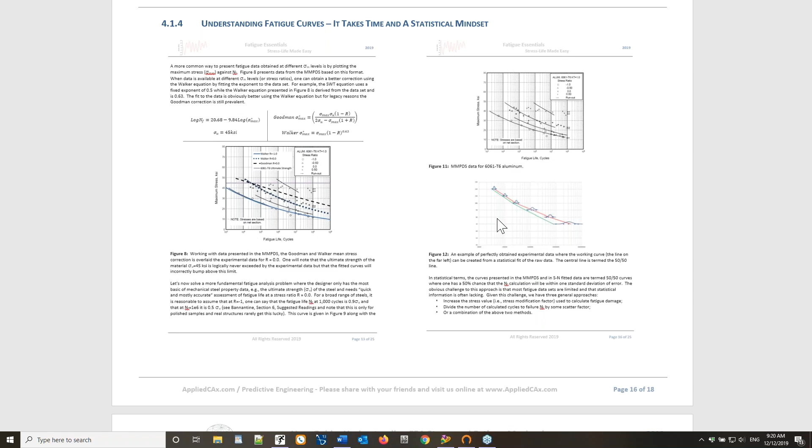We always take some fraction of that, back it off a little bit for more margin. I think of it as really cute - you put a little statistical Gaussian distribution on the curve and use the data. For dealing with mean stress, you can find a lot of this in Dr. Bannantine's book. It's still in publication, I'm pretty sure - I actually downloaded a PDF off the web. It's really nice and straightforward, and of course there's tons of material out there.

Let's wrap it up. Accurate stress calc, duh. Little variations in stress give big variations in life, we know that. All materials have defects - think statistically. Don't just use the line; always start out conservatively, then tighten it up. Infinite life at half yield stress is well grounded in metallurgical reality, all defects, and engineering mechanics.

Why compressive stress is good - and I like to say this too. You made it. Congratulations. You now know more than 90% of your colleagues about FEA stress interpretation and the fundamentals of fatigue.

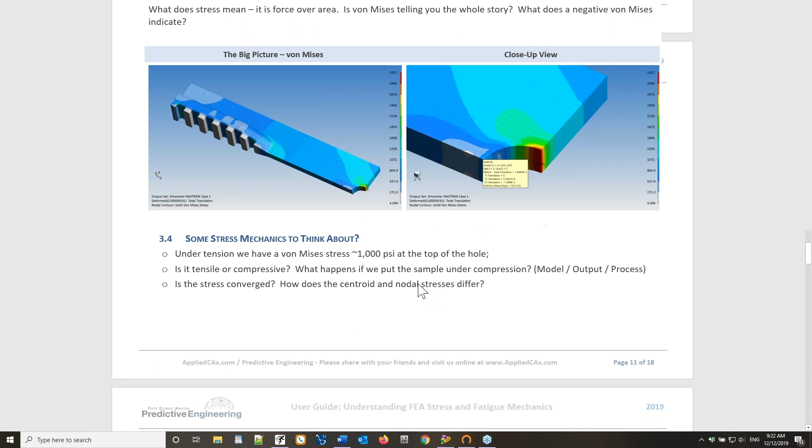It says, you mentioned that fatigue modeling of composites has some differences from isotropic solids modeling. Would you be able to touch on some of these differences? Assuming that's probably a pretty big topic in and of itself.

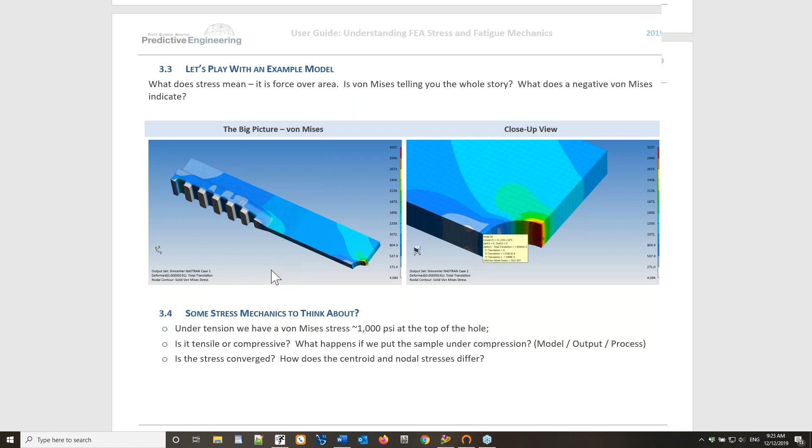No, because it's so chemical. The glass is a glass, it just pops. And then fatigue on the composites, as you can guess, it's all about the interfacial chemical bonding between the fiber and the goo. And that's why Toray Chemicals out of Japan sort of owns the market, because they have the special sauce on their glue, on the epoxy, to maintain interfacial shear strength on it.

Sounds like, do you have any of the references for those that maybe we could include? No, I'm not going to do it. No, I'm not going to touch that one. All right, that's a whole, you know how it goes. It's like, yeah, here, take this. And then people are going to ask me more questions.

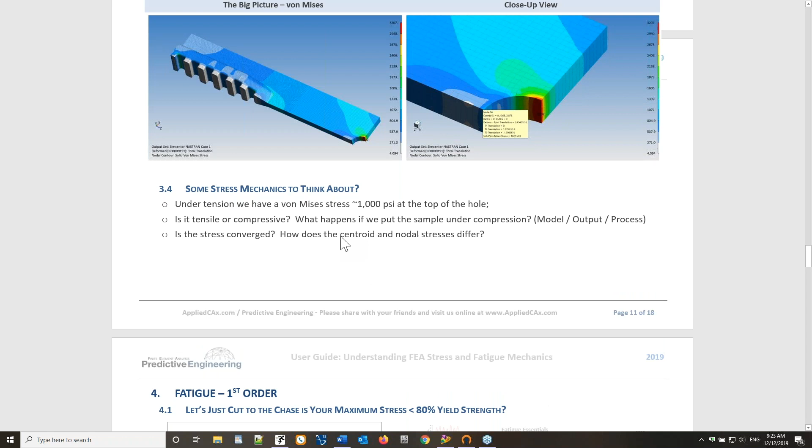Fair. Yeah, composite - I was going to say on this model here, if you didn't know where the other plane of symmetry was obvious, it's like this talk I heard at this little private university in Palo Alto about actuarial statistics on life expectancy. The guy was going to talk about all these things that affect your life expectancy, like driving a motorcycle, jumping out of an airplane. And he said, for all you guys that smoke cigarettes out there, you can just leave right now, because everything I'm going to talk about has a much less statistical chance of killing you than smoking cigarettes. Thought that was funny.

It relates to the mechanics here - if understanding the symmetry of components isn't just first order obvious in your head, then everything else I'm going to talk about is too complex. That's why I always like to start with the foundation and know that really, really well with no doubts, because then you have a base to jump off of.